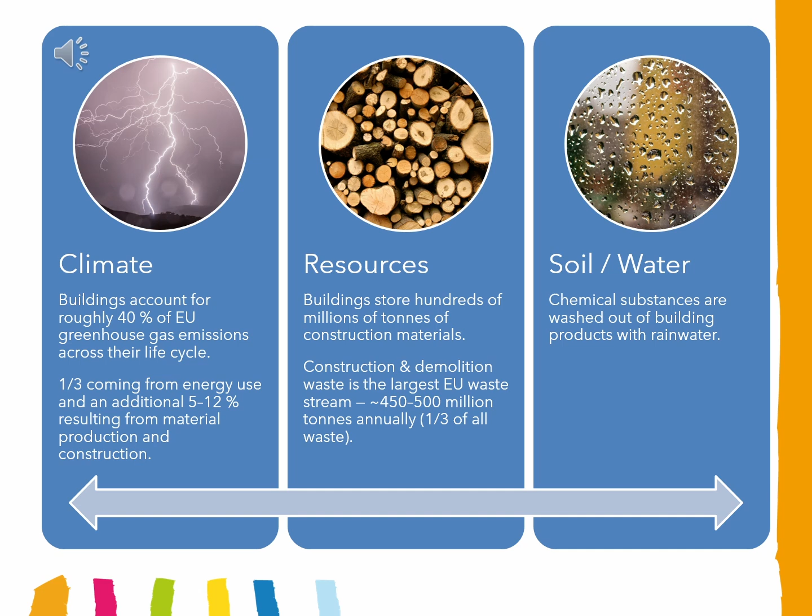Finally, many building products release chemicals that can wash off with rainwater and enter soil and water systems, creating long-term environmental pressure. Buildings shape far more than the skylines of our cities. They affect outdoor air, indoor air, and the ecosystems around them. Volatile organic compounds from paints and coatings contribute to outdoor air pollution. Formaldehyde from composite wood products compromises indoor air quality and can contaminate surrounding soil and water.

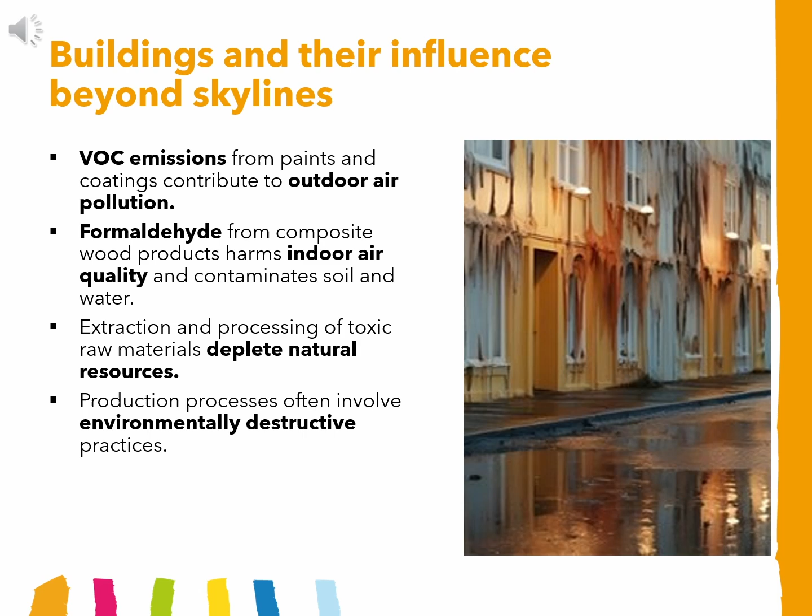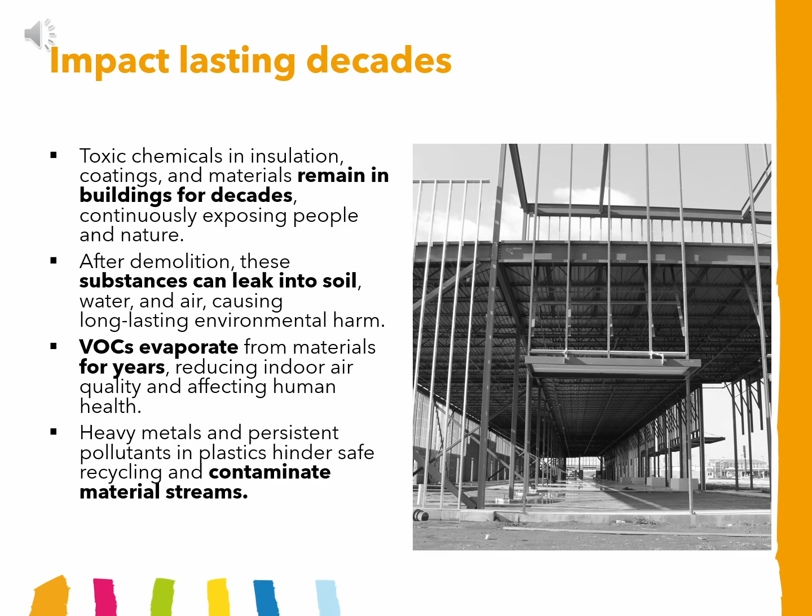Extraction of materials and production processes often rely on resource-intensive and environmentally damaging methods. Altogether, the material choices made in buildings create a chemical footprint that lasts for decades. Once harmful substances are built into a structure, they can remain there for decades. Insulation, coatings, and various finishing materials can slowly release chemicals over time. Even after demolition, these substances may continue to leak into soil, water, or the air. Volatile organic compounds can evaporate for years, and persistent pollutants can contaminate recycling streams, making safe circularity more difficult.

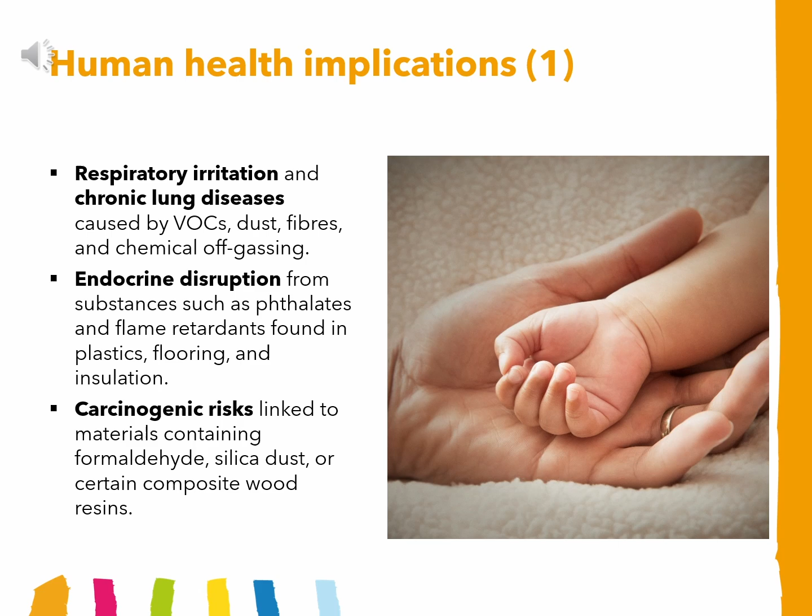Toxic substances in building materials also have direct impacts on human health. VOCs, dust, and fibers can irritate airways and contribute to chronic respiratory problems. Some additives, such as phthalates and certain flame retardants, can disrupt hormonal systems. Others, including formaldehyde and silica dust, are linked to cancer. Children, pregnant women, and older people are particularly vulnerable, and they often spend more time indoors.

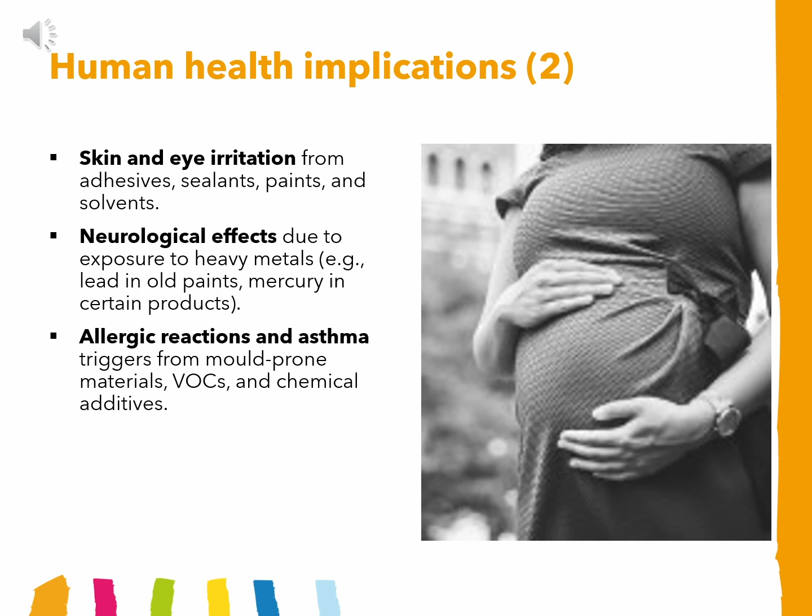Other impacts include skin and eye irritation caused by solvents, adhesives, and paints. Exposure to heavy metals found in older materials can influence neurological development. And mold-prone materials, VOCs, and chemical additives can trigger allergies or asthma symptoms. Indoor environments matter, and poor materials can make indoor spaces harmful.

So, why are hazardous substances still so widespread in construction materials? The answer lies in performance. Our expectations for buildings are higher than ever. Clean facades, dirt-repellent surfaces, and strict fire safety requirements. To achieve these, manufacturers add chemicals such as biocides, PFAS, bisphenols, and flame retardants. These additives deliver convenience and durability, but at a cost to health and the environment.

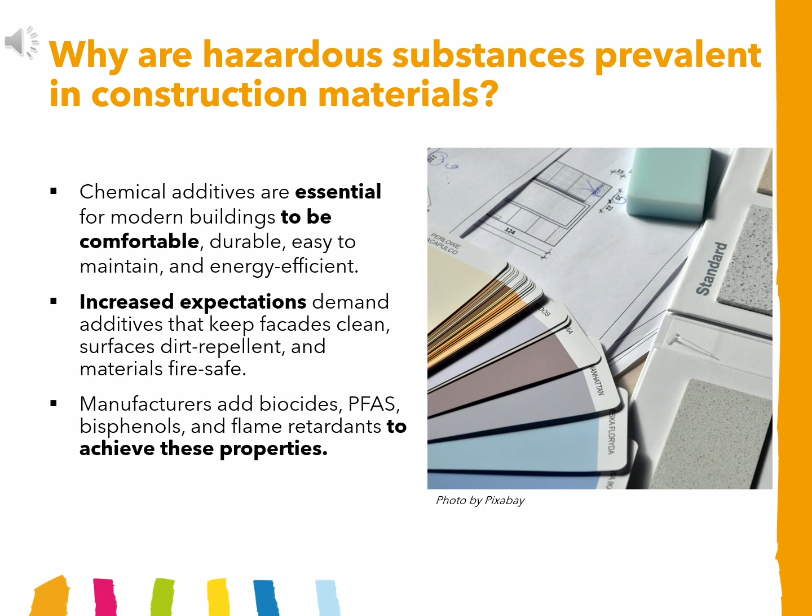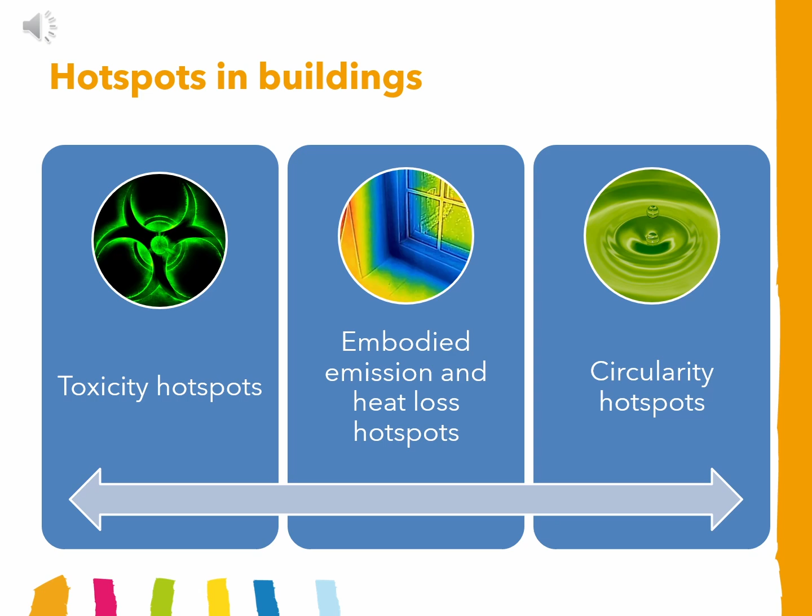Within a building, certain areas become hotspots for toxicity, embodied emissions, heat loss, or circularity challenges. For example, wet rooms often require materials that impact both toxicity and circularity. Understanding where these hotspots occur helps designers, builders, and municipalities take preventive action by choosing safer materials and planning for maintenance and reuse.

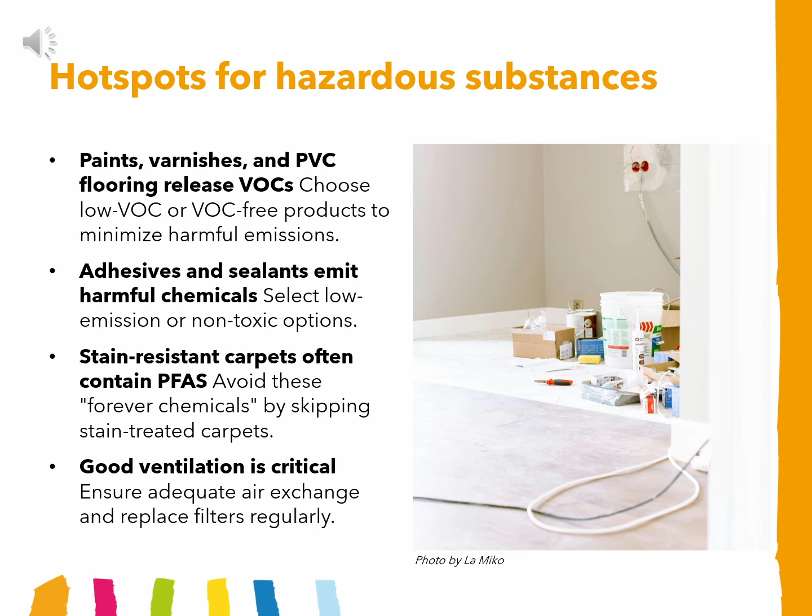The most critical toxicity hotspots are large surface areas, walls, ceilings, and floors, where paints, varnishes, and PVC flooring release volatile organic compounds. Adhesives and sealants are another concern, as they emit harmful chemicals. Carpets treated with stain-repellent coatings may contain PFAS, the so-called forever chemicals. Good ventilation is essential to reduce exposure and maintain healthy indoor air.

Real-world exposure doesn't happen one chemical at a time. We are exposed to mixtures, chemical cocktails, and their combined effects are often poorly understood. For hormone-disrupting chemicals, there is no safe threshold, and additive effects should guide regulation. Studies show that even very low levels can cause harm when multiple substances interact. This is where the precautionary principle becomes crucial.

The structure of a building, its concrete, steel, or timber frame, is usually the largest source of embodied emissions, sometimes up to 80%. Avoiding unnecessary surface treatments helps reduce both toxicity and future waste problems. Heat loss hotspots occur in the building envelope, insulation, airtightness, windows, and doors. Where different building elements meet, such as corners or balcony edges, detailed planning and modeling are essential.

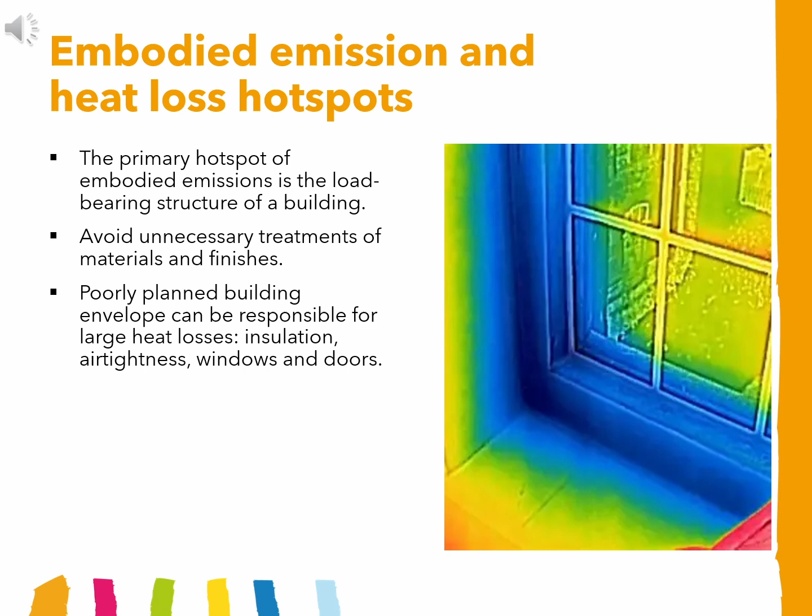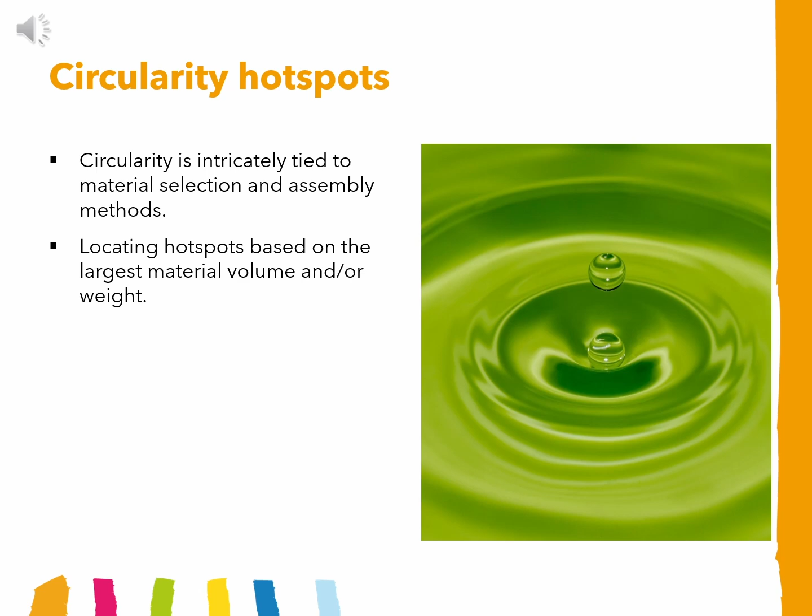Circularity depends on how materials are selected and assembled. Hotspots appear where layers are fused together, making disassembly difficult. Areas with heavy material use also require careful planning to ensure that reuse or recycling pathways exist. Glued insulation on structural elements, for example, can block the circular potential of both materials.

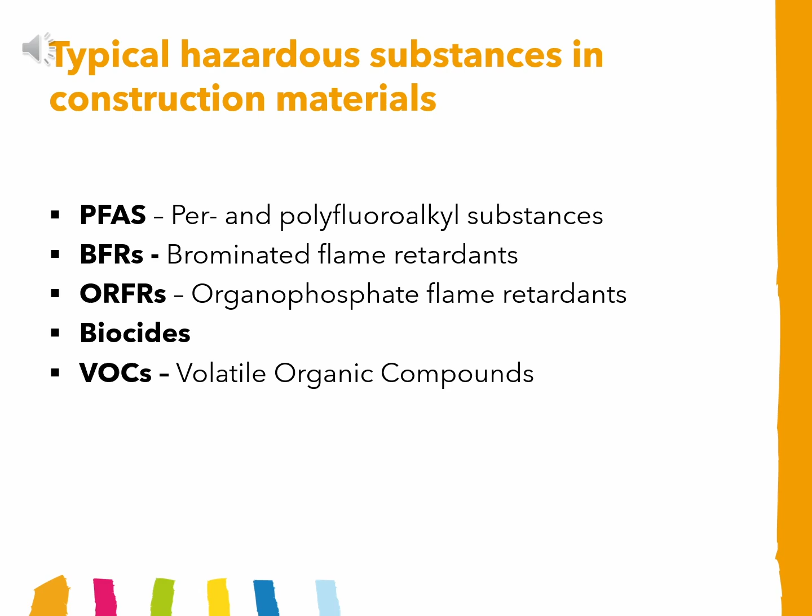Typical hazardous substances in construction include PFAS, brominated and organophosphate flame retardants, biocides, and volatile organic compounds. Each group brings specific risks for human health and ecosystems. PFAS, often called forever chemicals, include more than 10,000 compounds. They are highly persistent, mobile, and can bioaccumulate in living organisms. Some PFAS are linked to endocrine disruption, reproductive harm, and cancer. Their water and stain-repellent properties have made them common in textiles, flooring, insulation, paints, coatings, and sealants.

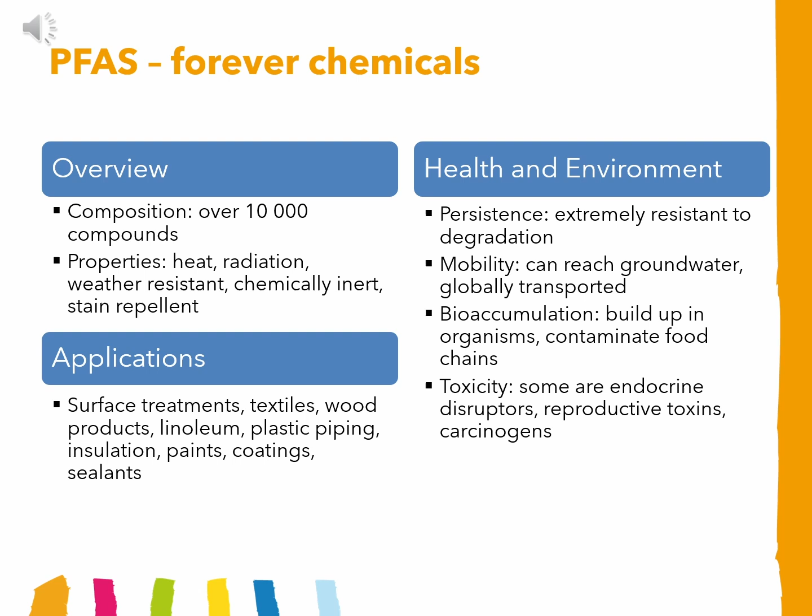Brominated flame retardants are used to reduce flammability in plastics, foams, and finishing materials. However, many are persistent, mobile, and toxic. Some are carcinogenic or endocrine disrupting, and residues are found globally, even in remote areas. Despite restrictions, these substances often remain in recycled materials.

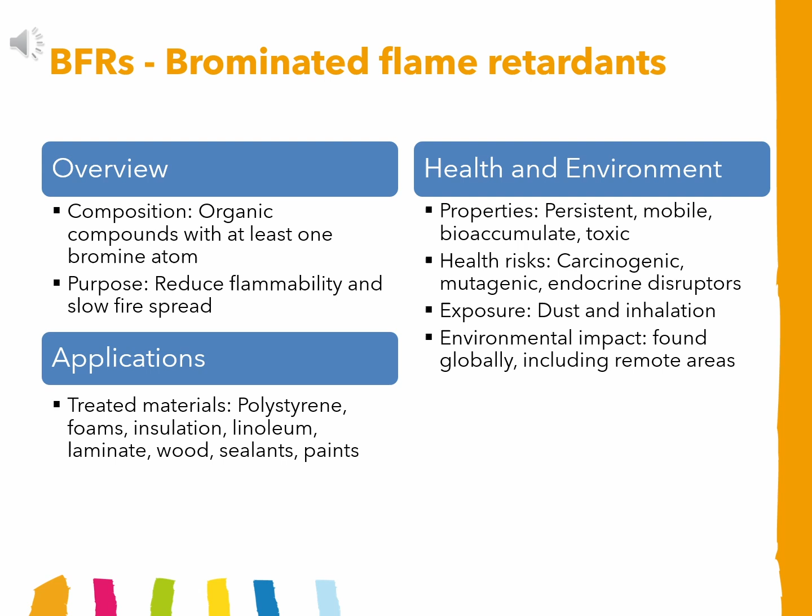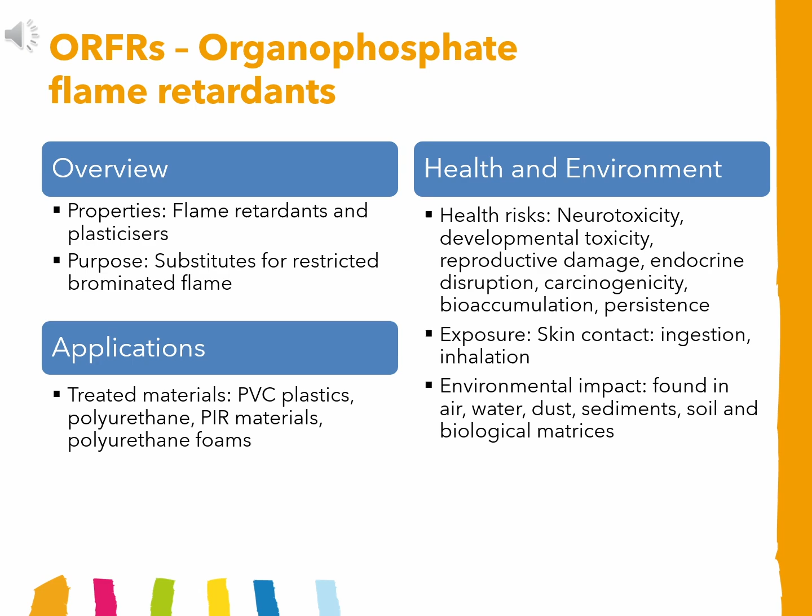Organophosphate flame retardants are used as substitutes for some restricted brominated compounds. They function both as flame retardants and plasticizers and are commonly found in PVC, polyurethane foams, and insulation materials. But they pose their own risks, including neurotoxicity, developmental and reproductive harm, and endocrine disruption. They are widely detected in indoor air, dust, soil, water, and even in humans.

Biocides protect materials from mold and microbial degradation. They are commonly used in paints, coatings, sealants, adhesives, wood products, and natural fiber insulation. Because they are designed to kill living organisms, they are hazardous to humans and the environment. Many biocides are harmful to aquatic life and can affect indoor air quality through off-gassing.

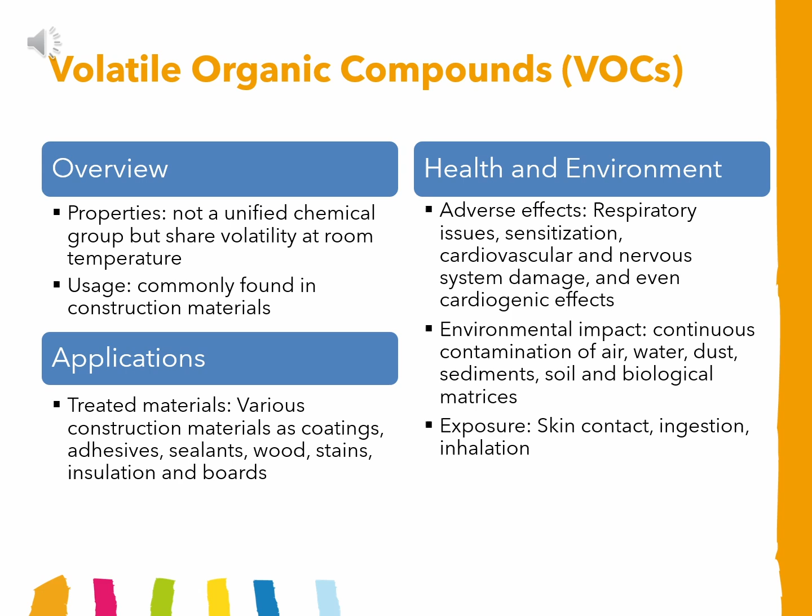Volatile organic compounds evaporate easily at room temperature and are found in a wide range of construction materials, including paints, sealants, flooring, and insulation. VOCs contribute to respiratory issues, allergies, cardiovascular stress, and in some cases, cancer. They also degrade outdoor air quality when they form ground-level ozone. Choosing low VOC or VOC-free products significantly reduces exposure.

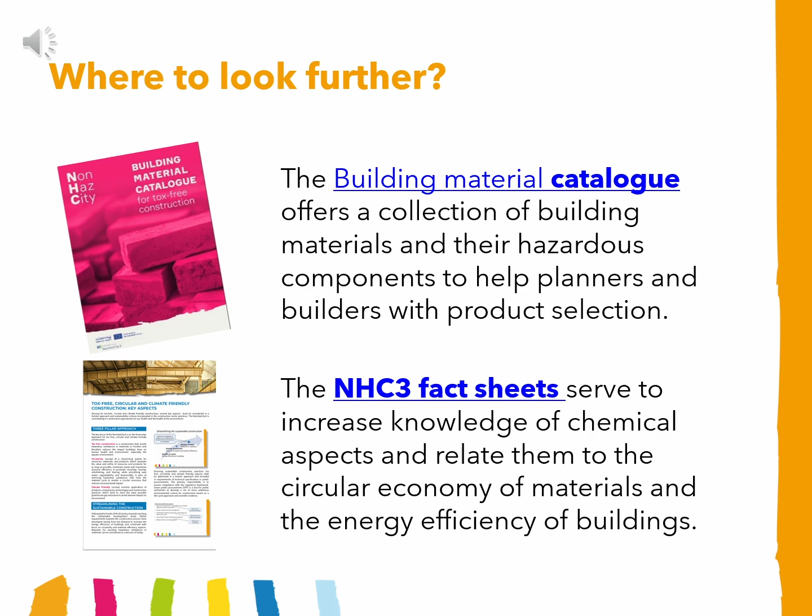To support safer decision-making, the Building Material Catalogue provides detailed information on hazardous substances in common materials. The NHC3 fact sheets offer practical guidance linking chemical safety with circularity and energy efficiency.